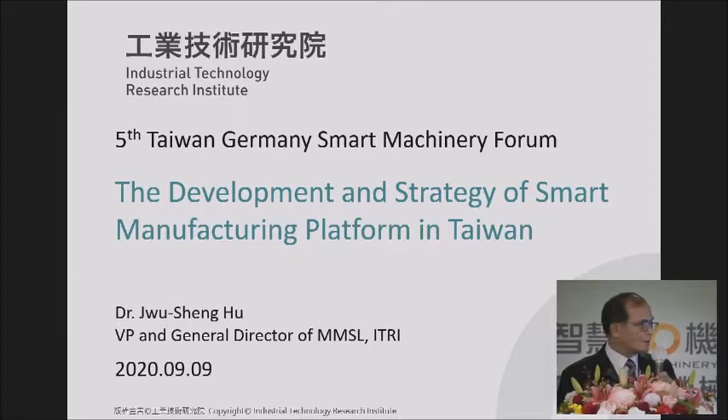So today, my talk will describe again our policy for smart machinery, and next I would like to talk about our newly launched program to establish a machine cloud in Taiwan, where we have made some progress. Then I will talk about some applications, and finally the conclusion.

Now, current status: enterprises in either Germany or Taiwan are mainly SMEs. As you can see, there are a lot of SMEs in Taiwan as well as in Germany, so the target for digital transformation is mainly on those SMEs.

Our smart machinery promotion program in Taiwan has the goal to facilitate the adoption of smart manufacturing in the manufacturing sector. We already launched the program several years ago, so we have a very clear picture of how to promote digitization for our industry.

Mainly for SMEs, they are beginning to do the digital transformation. In other words, their status should move from Industry 2.0 to 3.0. During this segment, the main purpose is to do digitization, in other words, automation plus digitization.

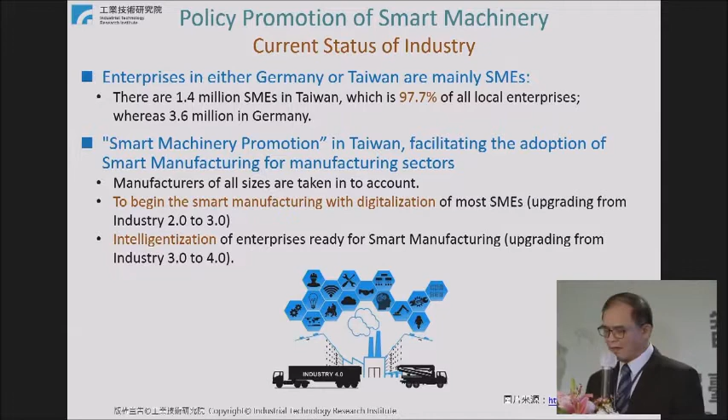But for industries that already have certain scale or already have some program within their factory, their status will be 3.0 to 4.0. During this segment, the main purpose is how to utilize the data they collect, in other words, how to introduce AI into their factory.

Now, any type of technical means or technical methods to promote the industry, we should have goals. What is our purpose of doing so? In this slide we list 8 objectives.

For example, when we introduce digitization, our first goal is to do process optimization, in other words, to optimize the efficiency of the process. The second one is we want to have the least machine downtime as possible.

The third one is we want to increase our labor productivity. This is very important because of the aging society, so our productivity should be increased.

Quality management, inventory management, supply chain, supply-demand forecast, time to market—especially supply-demand forecast was very important during COVID-19 because of the lockdown. So every company was bookkeeping their manufacturing process because they didn't want to waste additional time producing products that cannot be shipped out.

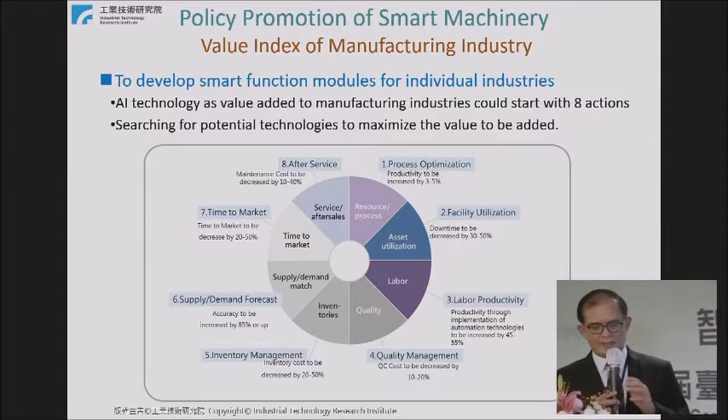For example, during COVID-19, everyone knows that we quickly assembled a team, thanks to Tommy and a lot of industry people. They assembled together to make masks for us. During one month, the team quickly supplied all the demand in Taiwan. This is a typical example of product development in manufacturing during COVID-19.

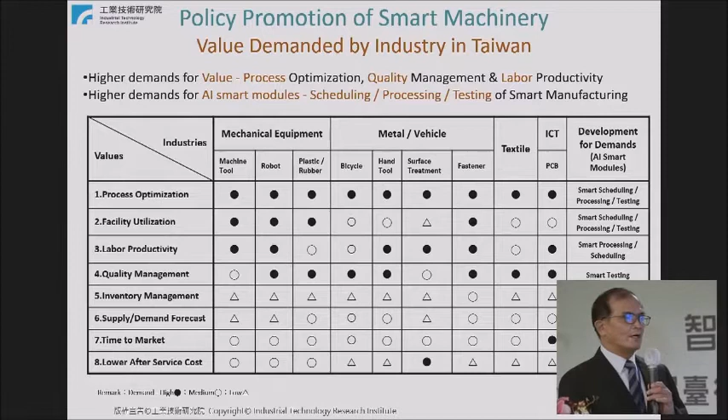So across the industry, like mechanical equipment makers, metal and vehicle industry, textile industry, and ICT industry, etc., for these objectives they have different requirements. The table shows that if it's a black dot, that means this is required.

As you can see, of course, all industries require process optimization. Some others are needed, and the hollow circle means they already have some capability to fulfill or increase labor productivity, but we need to inject some energy into the industrial sector to make it better.

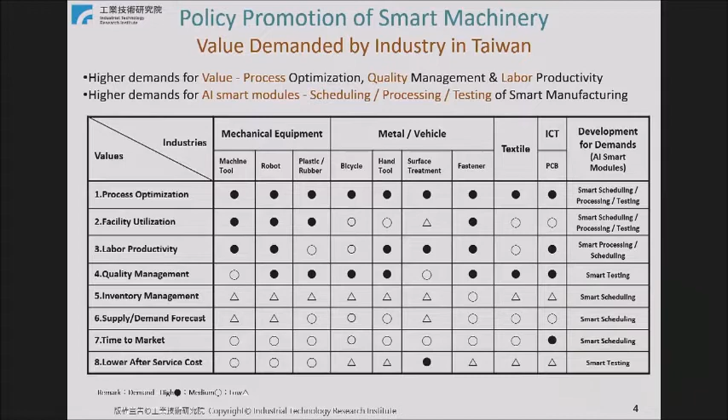So the government already has some type of investigation and conclusions on how we should focus our development or technology for different industries and what their needs are in terms of fulfilling the goals.

So the strategy to establish the platform is: we have the objectives, as I mentioned. The second one is we need a direction to fulfill the objective—we have to figure out what type of technology, like 5G or AI, should be injected into the platform to establish the capability to fulfill the objective. So these are the 7 approaches that we take from that direction.

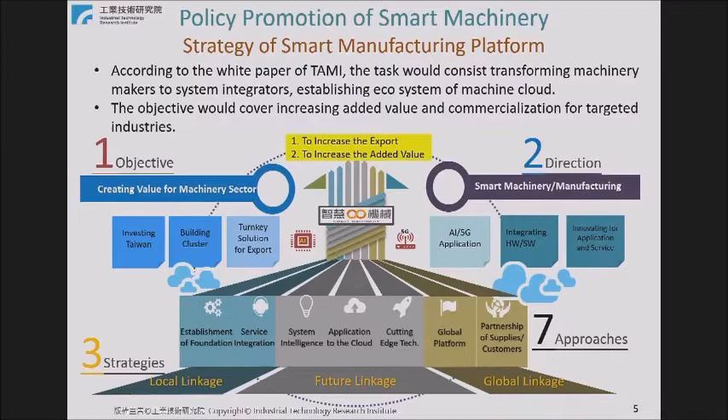So we need to establish the foundation for the technology, and we need to promote service integration and system integration, and we need to develop applications on the cloud, etc. All these approaches support the direction and achieve the objectives. This is the approach we take from the strategy side.

In terms of roadmap, I think the most important one is to promote the idea of cloud computing, cloud storage, or even the future interconnect manufacturing idea in Taiwan. So to promote, we call it the machine cloud. This is actually promoted also by Tommy. Should we have a machine cloud that can be adopted by many SMEs?

I think a very important point is that for a small scale company, if they want to establish their own cloud, they will have to spend a lot of money, and the cost is high. So it will stop them from adopting the modern technology. In other words, can we have an idea of creating clouds that can be shared by those SMEs to reduce their cost?

This is the roadmap we have. I think we already begin, but it will officially launch next year. We first establish infrastructure, then we will gather people to write their apps on the clouds, and encourage people in the manufacturing sector to use those apps.

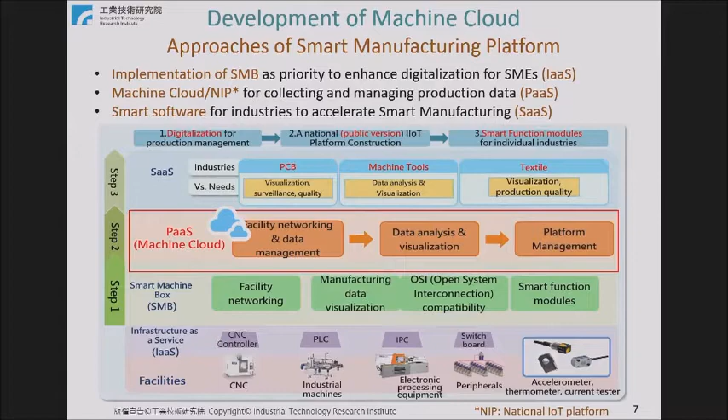No one wants to leak their manufacturing know-how to the cloud. So this is a very important point, that during our technical work we ensure the information security during the digital transformation. This is a more detailed view of the clouds.

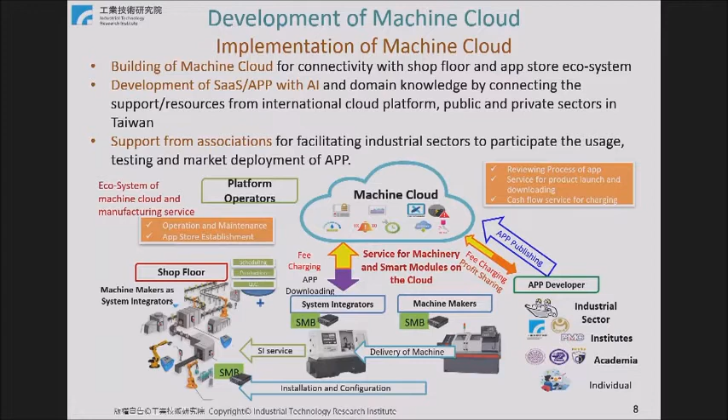One of the very important efforts in establishing the cloud is the industrial standard. Like I said, we have different types of standards on the floor. For example, machine communication - if the machine or the integration automation is made by Siemens, then Siemens has their own standards. If the machine is from some other company, they have different standards.

So all those shop floor standards should have some certain type of bridge transformation, bridging or transformation to the cloud. We are not trying to have a unified standard on the shop floor because this is not possible. But we should be open, so that the cloud can accept a lot of standards to extract the data onto the cloud. That's the main point.

Another one is, when we establish the cloud, what is the ecosystem if the cloud is established? Ecosystem means who will supply the service, how much money will the user pay for the service, and how do we qualify the app in order to guarantee and ensure the quality for the users, so that the user can use them. Those are not easy tasks, but they have to be done.

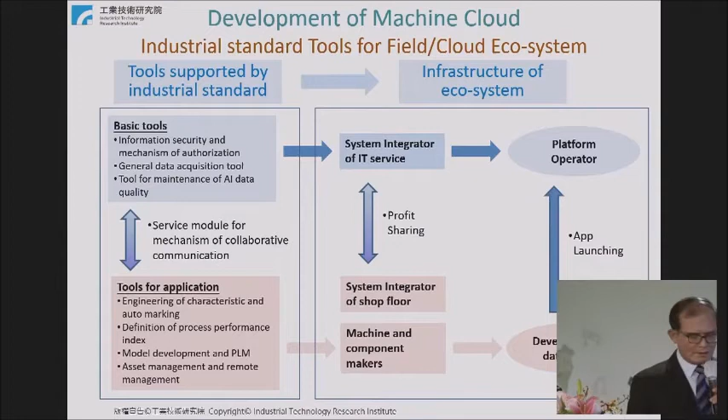In other words, if we don't do this, individual companies, especially SMEs, will find it very difficult to adapt to digital transformation. And of course, in the long run, we will establish the service model and testing with big data and connectivity. So other than developing the cloud infrastructure, we also try to see if we can introduce modern technology like 5G into the cloud system.

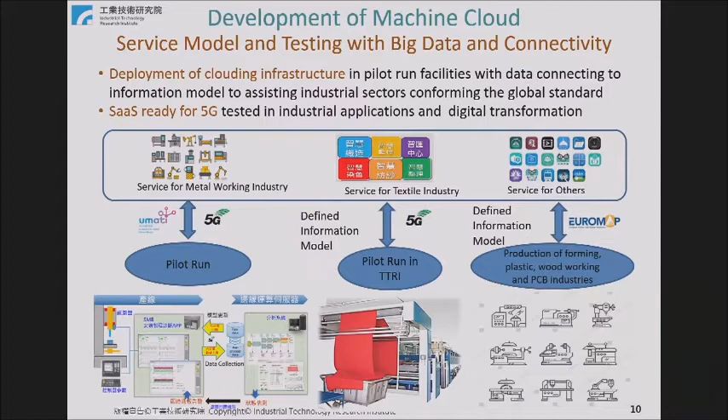We are thinking how maybe later on we can discuss what would be the most valuable point of 5G into the digital transformation, especially in the manufacturing domain. Nowadays people talk about 5G, but in order for it to really enter our factory, there's still some gap we're working on to find the value of 5G communication. It will involve communication efforts linking to different stakeholders, machines, and others.

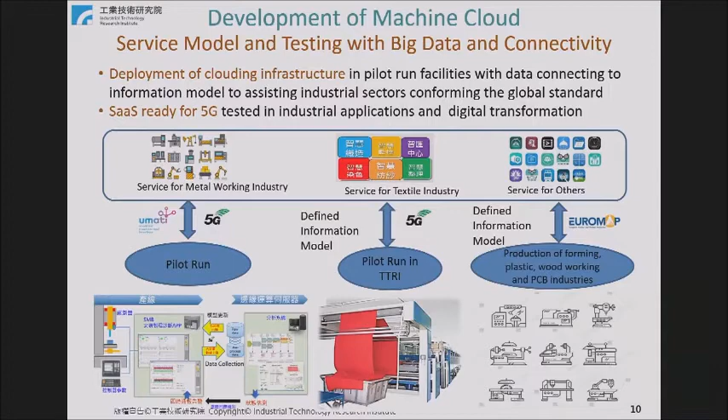These slides talk about the smart modules for optimization and the feedback for design. The previous slides talked only about manufacturing.

So five minutes, do I need to take questions or not? No. Okay, sorry, I thought I had to take questions, so my time is up. I only have a few slides left.

In order for machine cloud to work, the most important thing is what apps they provide. But this has to link directly to the shop floor with a lot of manufacturing know-how and needs. So this is another effort we need to make.

Right now our target is to promote this app by using the system integrator. There are a lot of system integrators in Taiwan, but their main business previously was to go to the factory, link machines together, and make sure everything worked automatically, that's it. But in the future their business can be upgraded if they can collect data from the shop floor and provide software to serve their customers.

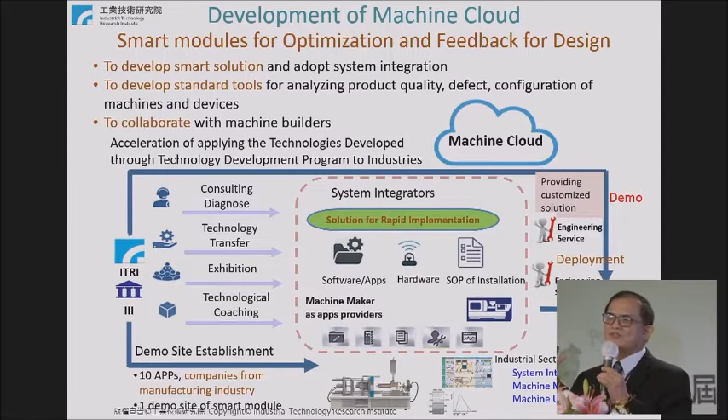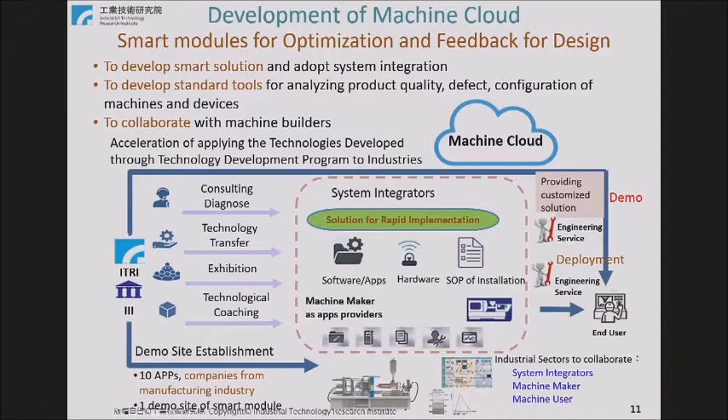So the system integrator is really the target, the main focus in future digital transformation, because they know ICT and they can contact directly with the shop floor. We are gathering many different types of system integrators to all work together to promote this idea. And in order to do that, because they want to do business, they need a store, right? If we want to sell something, we need to open a store.

In other words, we need to open a cyber store. The store is on the cloud side. We want to solve the problem so that the system integrator or app provider can focus their efforts on writing the app, without worrying about how to deploy it.

They don't want to have to worry about how their customers can access their app. Even if they have an upgrade of the app, the platform can facilitate the functions for them to do that. In other words, we'll minimize the cost for app providers, and that will also boost the usage of the machine clouds.

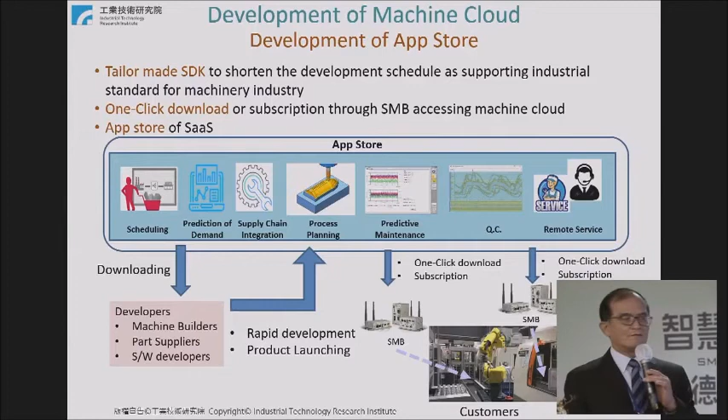There are some small activities to test our system. The first one is the plastic injection industry. We focus on plastic injection machines to enable their digitization by adopting cloud technology, as I said.

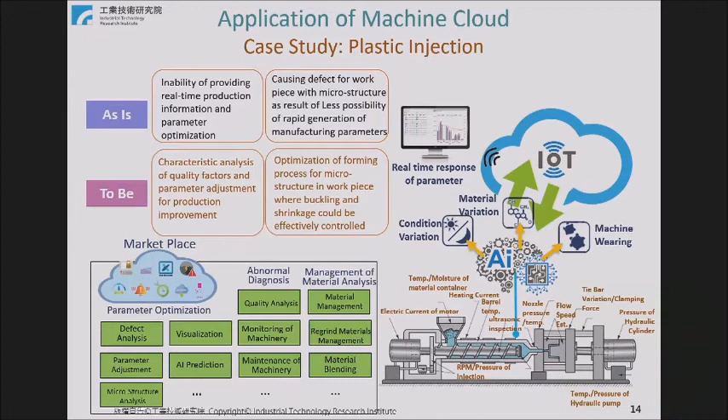This is previously without digital transformation. We try to use the technology, and after that we wish the injection machine can be digitized with a lot of smart functions through the cloud service.

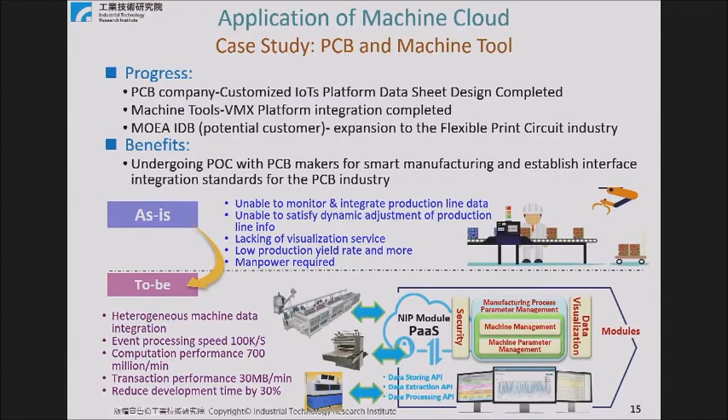The second one is also from the PCB and machine tool industry, and this has to do with the line of production. We also adopt the technology, and we have already engaged with some PCB manufacturing industry to deploy the technology for a test.

So in conclusion, to take home today, my main idea is to explain our effort for the next several years to establish the cloud for our SMEs. This is jointly promoted by TAMI and a lot of industrial associations in Taiwan. We want to promote the machine clouds, but we will first focus on several industries to make successful examples for others to know.

And the last one, but not the least, is that we want to gather a bunch of system integrators and software developers, and also people with manufacturing expertise, so that they can write apps on the cloud. This concludes my talk. Thank you very much.